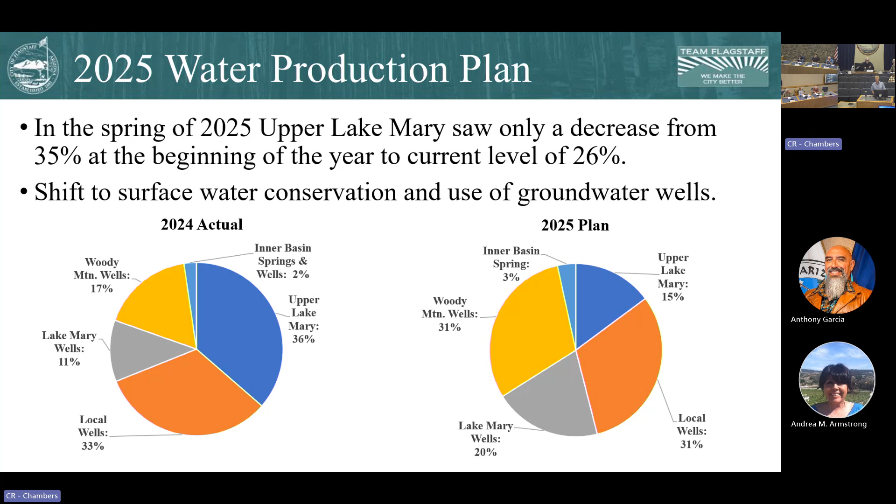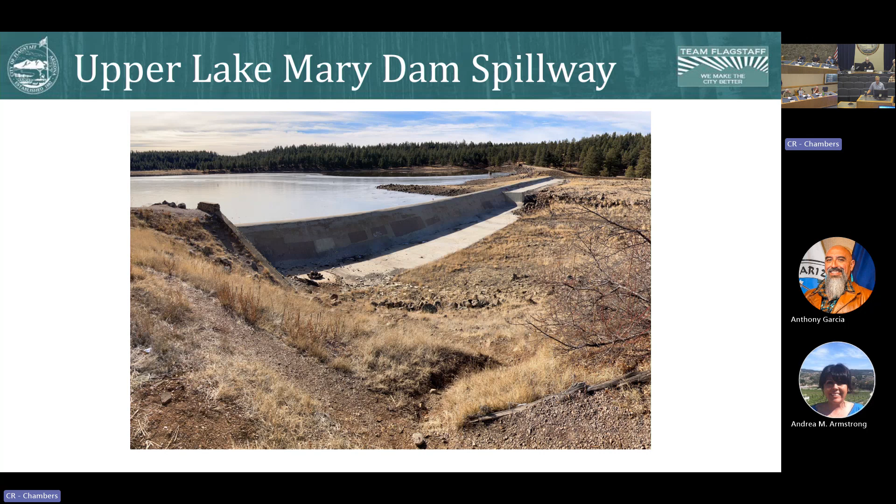It's not a good year for surface water production, but it will be a good year to deal with our Upper Lake Mary Dam spillway. For the last 7 or 8 years, Arizona Department of Water Resources has recommended that we deal with the concrete spalling of the spillway. You can see here in these up-close pictures. When the lake level is below 40%, we can touch both sides of the dam, so this spring is a great time to deal with the dam. We have Kear Civil, or Pride Development and Construction, planning on completing those repairs this spring.

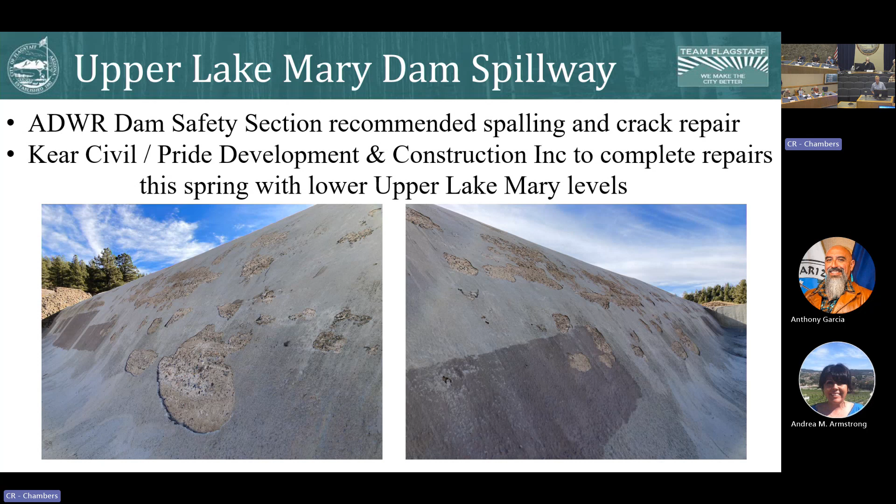Moving on to our Lake Mary Water Treatment Plant Sedimentation Basin Rehabilitation. This project's been in the works for a while. A brief history: in 2014, the Water Infrastructure Master Plan by NCS Engineers identified the sed basins as the highest priority needing attention in water production. In 2017, we did a condition assessment by Brown and Caldwell, which found severe corrosion and degradation with equipment near twice its design expected lifespan.

In 2020, we went through a design of the rehabilitation of the basins with Brown and Caldwell, though after that design was complete, a solicitation was canceled due to budgetary reasons. In 2022, we went back through the design to tighten up the specifications. A solicitation after that was also canceled due to budgetary reasons. So it's good at this point to be with PCL. We awarded them the pre-construction phase services for the project. PCL is currently working on those pre-construction designs, and you'll most likely be hearing about guaranteed maximum prices, or GMPs, moving forward with the project later this year.

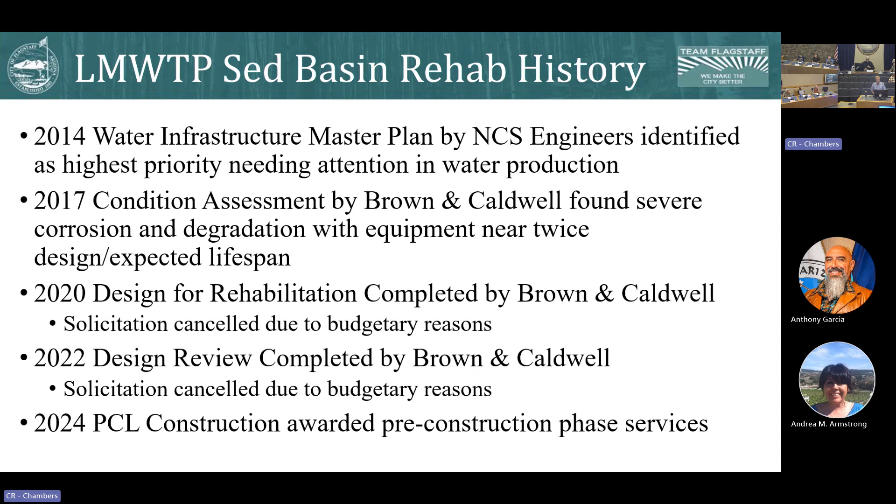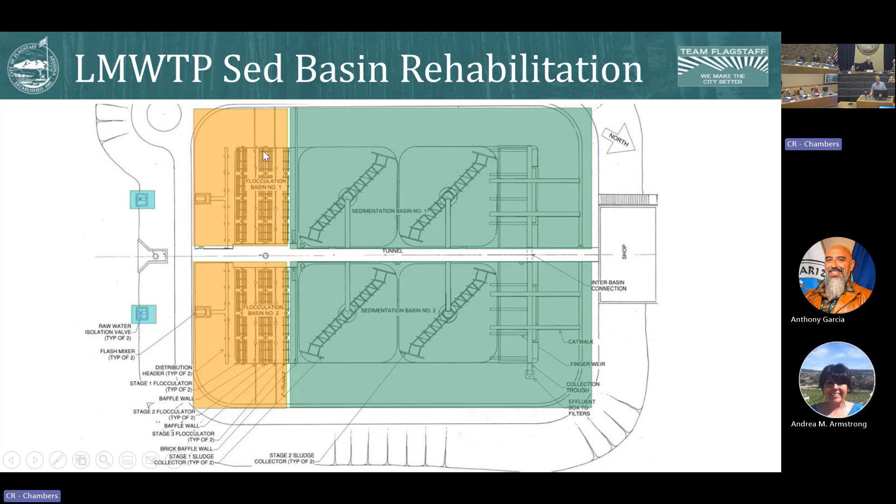For those of you unfamiliar with the sedimentation basins, here's just an overview. We'll basically be dealing with all of this infrastructure, replacing the flocculators, the sludge collector, infrastructure, all of the concrete supporting walls and structures, and adding a static chemical mixer.

A little hard to look at. This is some pictures of the existing infrastructure, near twice the design lifespan. You can see the concrete coating has dissolved over the years with low pH water, and you can see the aggregate, the existing sludge collectors from the 60s.

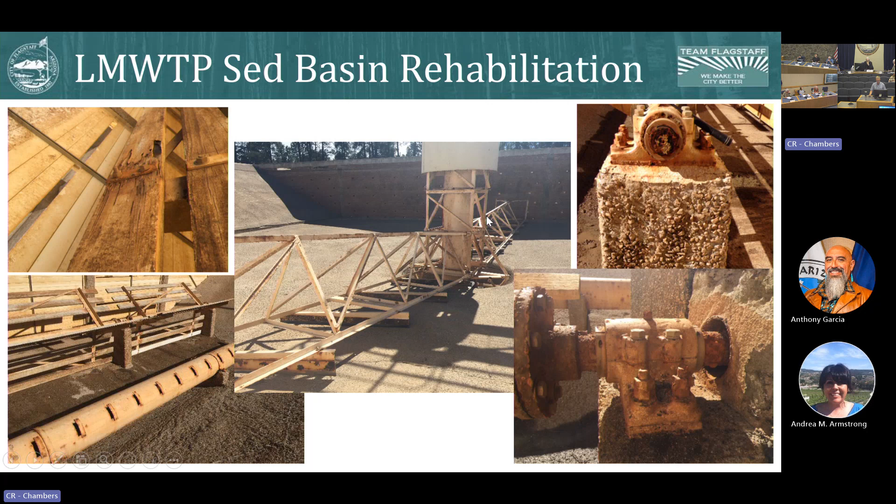Moving forward with the Lake Mary Water Treatment Plant master meter replacement. Brief history: in 2017, Carollo engineers did a technical memorandum of all water production flow meters. They found the current insertion mag meter was installed incorrectly or poorly with insufficient velocity at only 0.3 feet per second. 3 feet per second was recommended. Later that year, Carollo then designed a replacement master meter for the treatment plant.

All water from the Lake Mary wellfield, in addition to surface water, passes through this flow meter. Carollo's design included a new vault with smaller size to increase the velocity, increase the accuracy and precision of the meter. However, in 2019, a solicitation for that was canceled due to budgetary reasons.

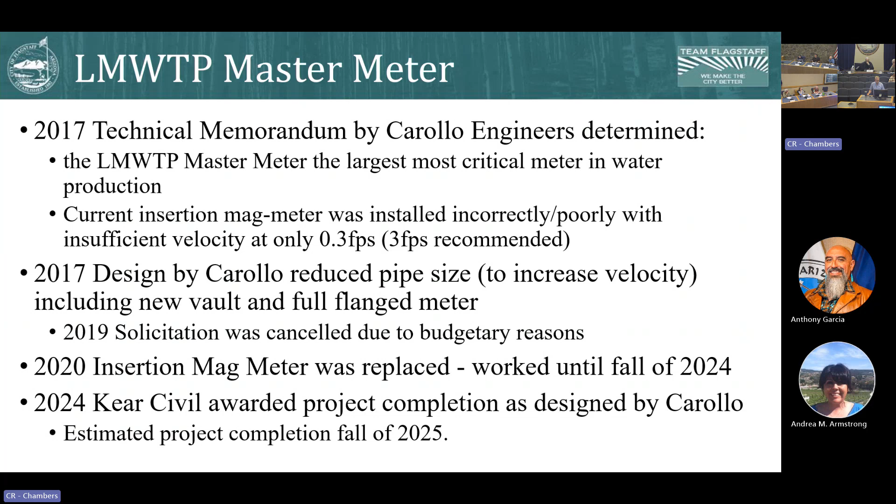In 2020, we at least replaced the insertion mag meter. That's worked pretty well. It took quite a few tweaks and adjustments, but that meter failed in the fall of last year. So we've awarded in 2024 Kear Civil to build the design completed by Carollo in 2017 to replace the master meter at the plant with the vault. Kear is currently collecting supplies and materials necessary for the project, and they're hoping to complete that this fall.

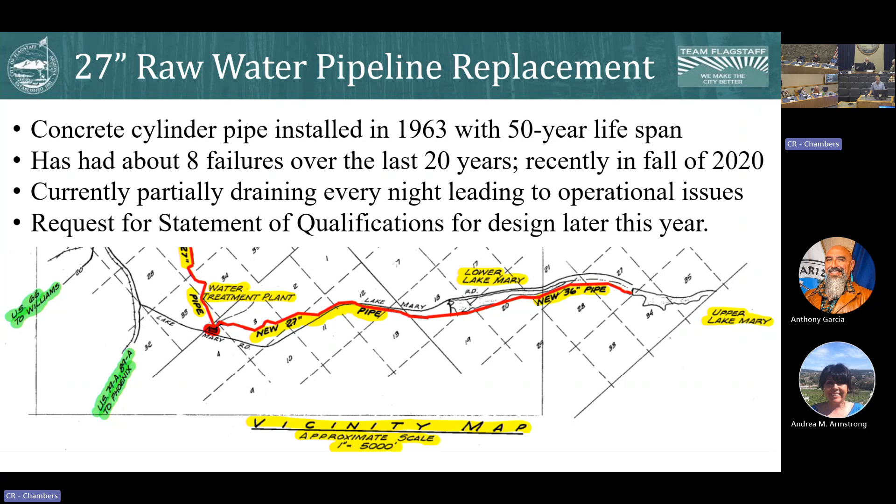Brian: On the 27-inch raw water pipeline, is the plan to remove that and replace it with new pipe, or abandon that pipe in place? A lot of those decisions haven't really been made yet. I think one of the latest plans was to do a parallel pipeline, leave the 27-inch where it is and replace it with possibly a smaller, maybe a different material pipeline. So basically a parallel replacement, leaving the 27-inch in place, but essentially abandoned.

I know the elevation at the Lake Mary Water Treatment Plant is a little higher than the lake itself, the crest of the dam. I was just kind of trying to think out of the box when I was looking at this project, if there's any potential for using that old pipeline to put water back into Lake Mary. Possibly. There's also an even older, I think, asbestos concrete pipeline, maybe 12-inch, that was abandoned a while ago that you could perhaps do the same thing with. Just a thought. So, okay, that's all I had.

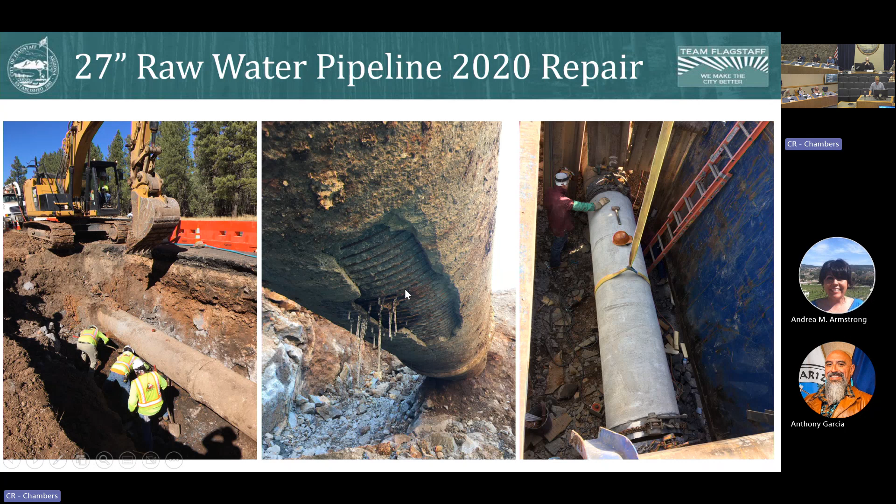Go ahead. These are just some pictures from the repair in 2020. This was an emergency repair that unfortunately happened when we had another one of our sources, the Woody Mountain well field, down for a project. You can kind of see the composition of that 27-inch pipe, the outside concrete, the bands, really thin gauge of steel, about 1/8 of an inch thick. And then this was the spool that we replaced after this was removed.

This project was awarded to Southwest Tank and Steel last year. Like I said, due to some weather and paint issues, there were some delays.

Just last Friday, the contractor, along with the paint supplier, came up with a solution involving rolling on the top coat of paint, which is just fine. That was going to be necessary for Buffalo Park tank in any case because of proximity to people. According to contractors, this is the same paint system used on the Golden Gate Bridge, so it should leave all these tanks in really good shape for 20 years. Lastly, the Buffalo Park tank, after it receives the paint system, will be getting a mural from Beautification Arts and Sciences.

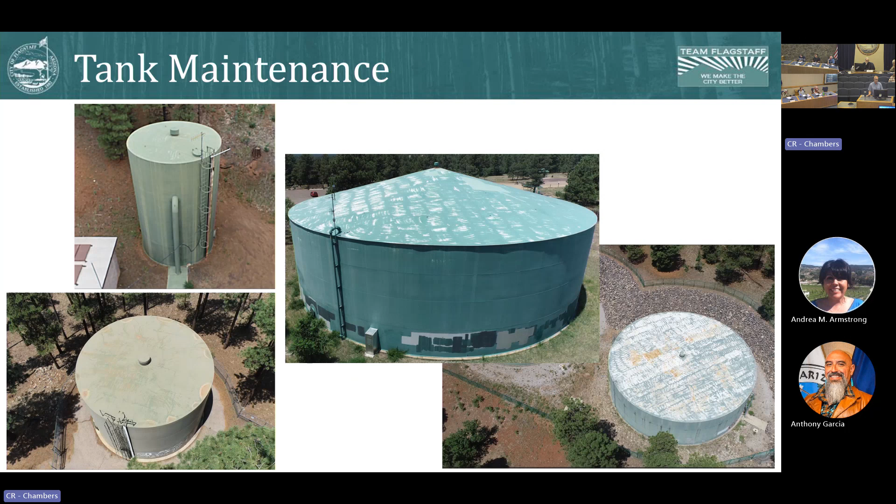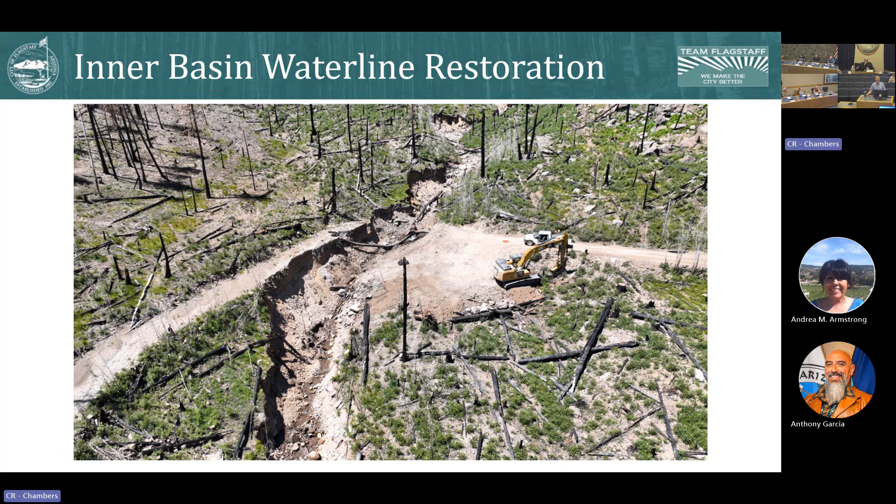Moving on to the Inner Basin waterline restoration. Most of you are aware of the pipeline fire in 2022 and the resulting devastation to the pipeline. Here you see the pipeline strung across this drainage at Site I. Hunter was mobilized in 2023. This is before they got to work on what became Site I. This is after Hunter repaired Site I along with the pipeline.

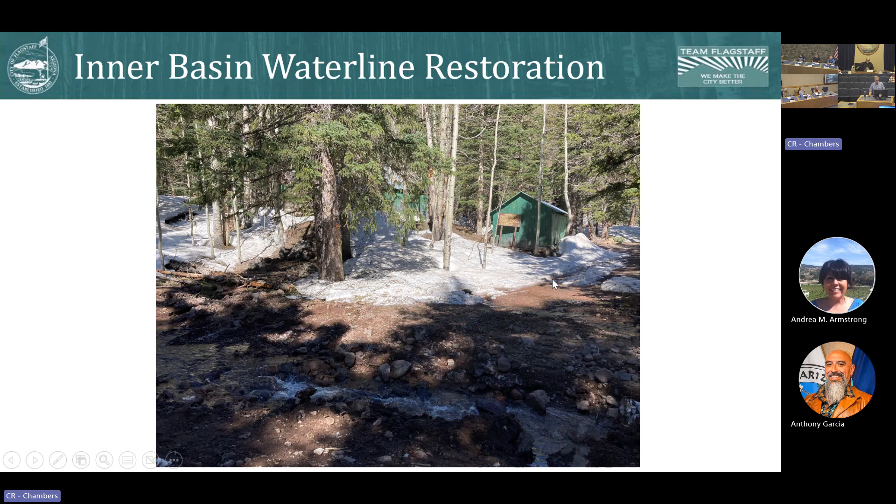Another location, if any of you are familiar with our Inner Basin cabin, Abineau Weir House. This is before any construction. And Site A, after Hunter added culverts and concrete.

In general, Hunter's been doing an amazing job. This project was funded by the Arizona Department of Forestry and Fire Management. Just excellent project management with David Peterson, Stacy Breckler-Nags. Hunter's been receiving award after award, starting with a safety award they received first, then also Project of the Year from the Arizona General Contractors Association, Water System Project of the Year from the Arizona Water Association, and Public Works Project of the Year, Disaster Emergency Construction Repair from the American Public Works Association.

Hunter's currently at work on the mountain. They nearly got blown off earlier in the week and had to halt their work, but they've been doing an amazing job over the last couple of years. They have a couple sites to wrap up. They currently have the pipeline removed for one of these sites, but just in general doing an amazing job. They're hoping to wrap up the project by this fall.

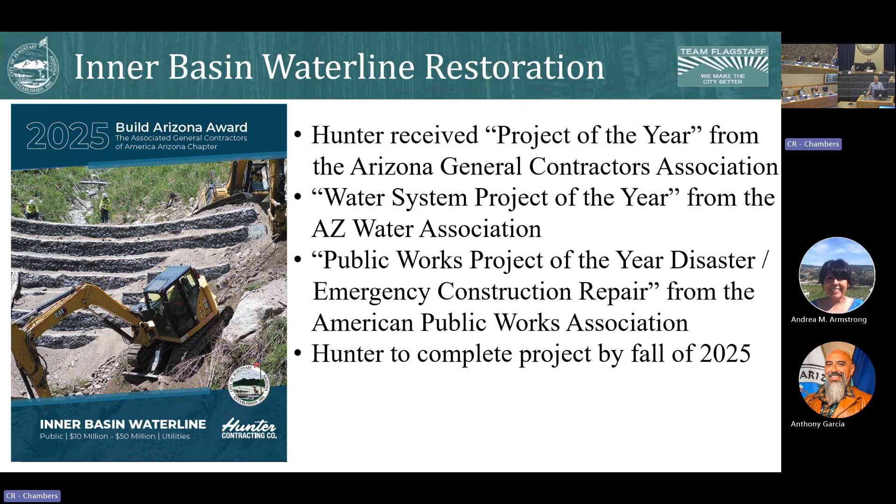Moving on to Arizona Public Service, or APS, Public Safety Power Shutoffs, Events, and Backup Power. Last spring, or the spring of 2024, APS announced PSPS events as part of their wildland fire mitigation strategy. Unfortunately, this would, or will, de-energize 75% of the city's potable water supplies. That's the Woody Mountain Wellfield, Lake Mary Wellfield, and Raw Water Pump Station. The Raw Water Pump Station pumps both groundwater from the Lake Mary Wellfield and surface water from Upper Lake Mary,

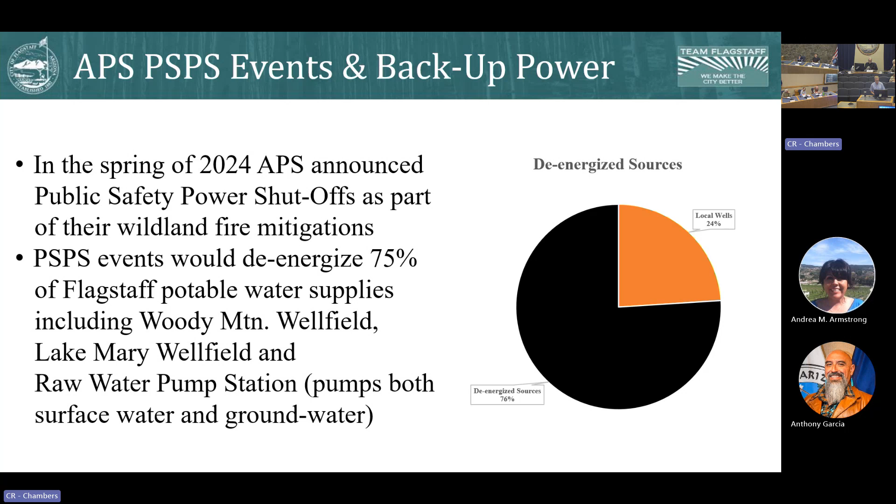It's not a catastrophic power outage that APS has relayed. And so, with local wells and the Lake Mary Water Treatment Plant unaffected, we're able to kind of pivot with the backup power that we've purchased and installed in the past.

Lee was part of a test of the Raw Water Pump Station with the backup power generator just a month or so ago. We found out that only really requires a single generator. With the other locations not needing generators, we're able to use those in the Woody Mountain Wellfield. We're currently underway installing backup power infrastructure, connecting generators in the wellfield where power drops from above ground to below ground at our Woody Mountain well number 6. Once that is completed, we should be able to power half the well field, or roughly 2.5 million gallons per day, with 4 of these generators. That makes the picture look a lot better.

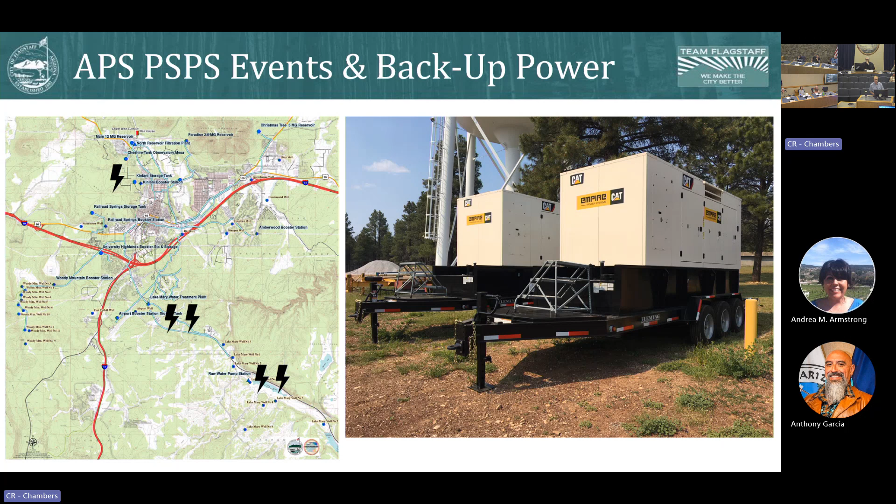In 2021, we drilled Tut Hill number 2 and tested it - that one tested at about 425 gallons per minute. We're underway with Carollo Engineers to reconfigure the well house to take in both Tut Hill 1 and Tut Hill number 2.

We first went through a design matrix where Carollo helped us make the decision whether to build two standalone well houses or reconfigure a single existing well house. We decided to reconfigure the existing well house - it was built with the potential to bring in another well.

This is a little exciting, I think, in that not only do we need to bring Tut Hill number 2 into the system - and reconfiguring the well house will enable that - but we'll also hopefully be able to unleash Tut Hill number 1 and gather more gallons per minute, taking that 1,100 hopefully up closer to the tested capacity of 1,500 gallons a minute, for a combined flow of about 2,000 gallons a minute, which is significant - as much or more than the entire Lake Mary well field combined.

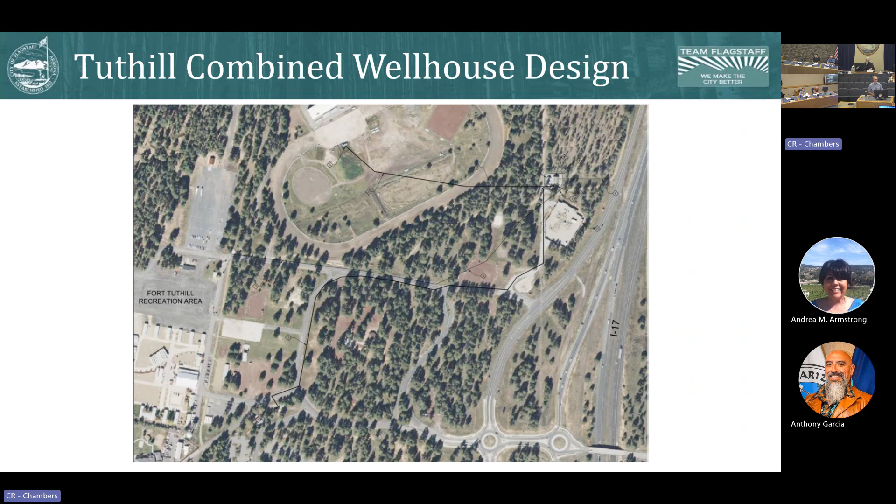Yeah, that was helpful. So it is directly involved - that master meter is directly involved in the control of pump operations. Yes. I see, okay, I didn't know where the controls came from. So, good. Any more questions from the commission for Brian? Yes.

For the water line work coming down from the inner basin, when the project is complete, does that mean we'll be able to deliver water to the North Reservoir? Yes, and we have. Hunter repaired the pipeline after mobilizing in the summer of 2023. We were able to use the pipeline, harvest water that summer. We produced not much, but about 8 million gallons off the mountain into drinking water, and also fill our exposed reservoir, if that's what you're talking about, from the early 1900s.

We don't use those exposed reservoirs, especially the one that leaks - we don't use that for anything. But the western one, we do store water that's not used for drinking water purposes, primarily for firefighting.

That pipeline has been used for all of the wildland fires in Flagstaff over the last couple decades, the Schultz Museum pipeline. For the museum fire, they did as many as 120 helicopter dips per day out of that exposed reservoir. The Inner Basin pipeline serves many purposes, including filling that storage reservoir.

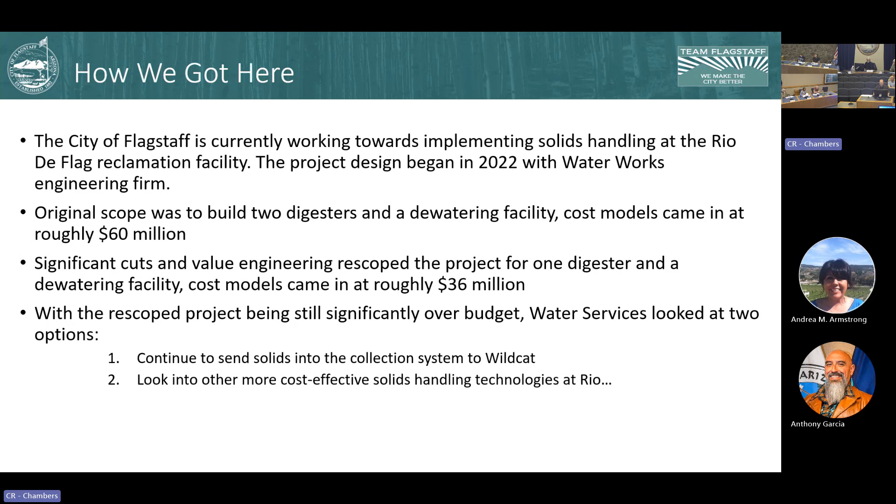Let's look back. In 1982, Wildcat was expanded to the treatment plant as we know today, minus the additions of the IFAS activated sludge process, 1 secondary clarifier, solids thickening, and solids geobag dewatering. The Rio de Flag reclamation plant was built in 1993 upstream in the collection system of the Wildcat Hill wastewater treatment plant, designed with 2 trains, each designed for 2 million gallons per day, and designed to produce A+ reclaimed water. Water conservation efforts has continuously increased wastewater concentration to Rio and Wildcat.

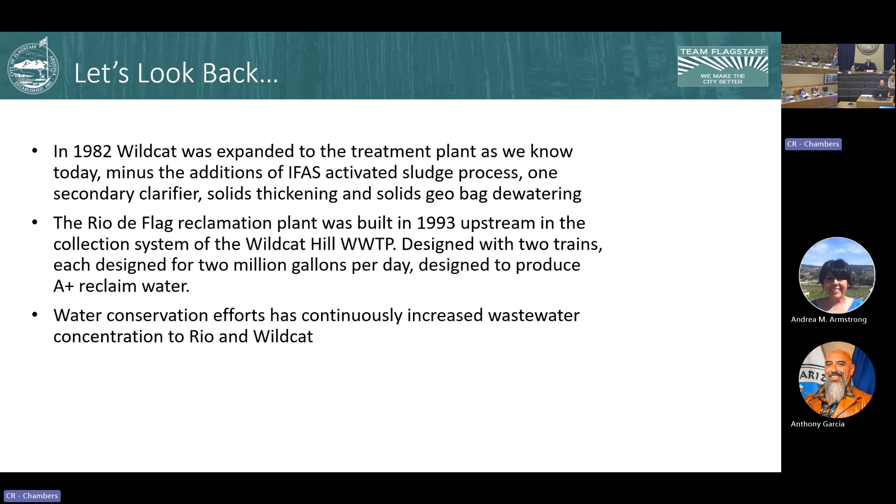Wildcat Hill design: in 1982 it was designed for an average dry weather flow of 6 million gallons per day, with a peak dry weather flow of 12 million and a peak wet weather flow of 20 million. Loadings were BOD, biochemical oxygen demand, of 10,800 pounds per day, and suspended solids 10,800 pounds per day.

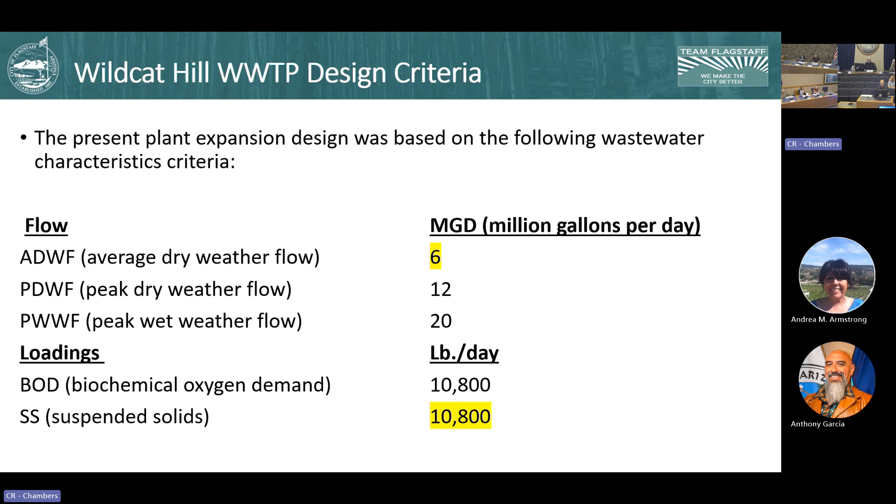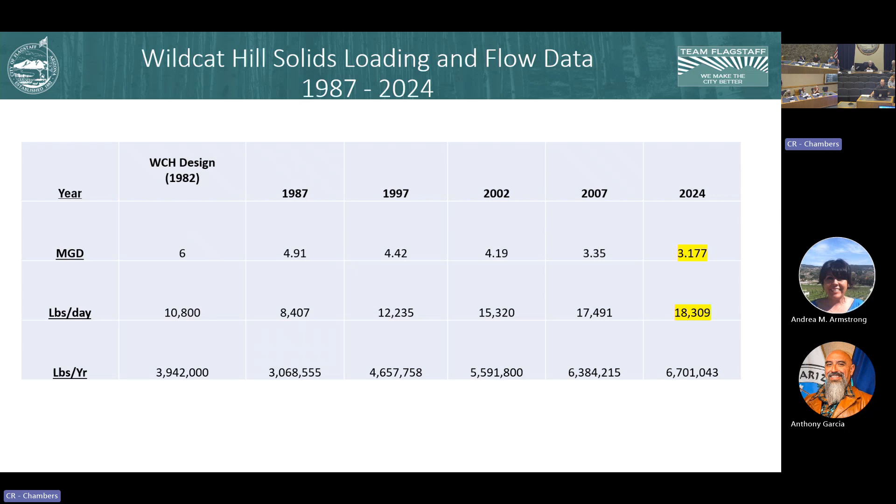In 2002, 4.19 with the loading of 15,320. 2007, 3.35 with the loading of 17,491. And for 2024, 3.177 MGD, 18,309 pounds per day.

The addition of the Rio de Flag plant: in 1993, the Rio plant went online upstream of Wildcat, designed to take flow, treat wastewater to reclaim water standards, and return the solids back into the collection system. Rio is designed to treat 3,970 pounds per day at 2 MGD. As of 2024, the plant treats 5,600 pounds per day at 2.2 MGD. Since the addition of the Rio plant, the Wildcat Hill plant has seen a reduction in flows, which is beneficial.

However, there's been a detrimental increase in solids loading in the following years to Wildcat. The reduction in flows to Wildcat can be attributed to both water conservation and the addition of the Rio plant. The increase of solids to Wildcat can be attributed to the increase in solids produced by the Rio plant and the expansion of City of Flagstaff and the surrounding areas.

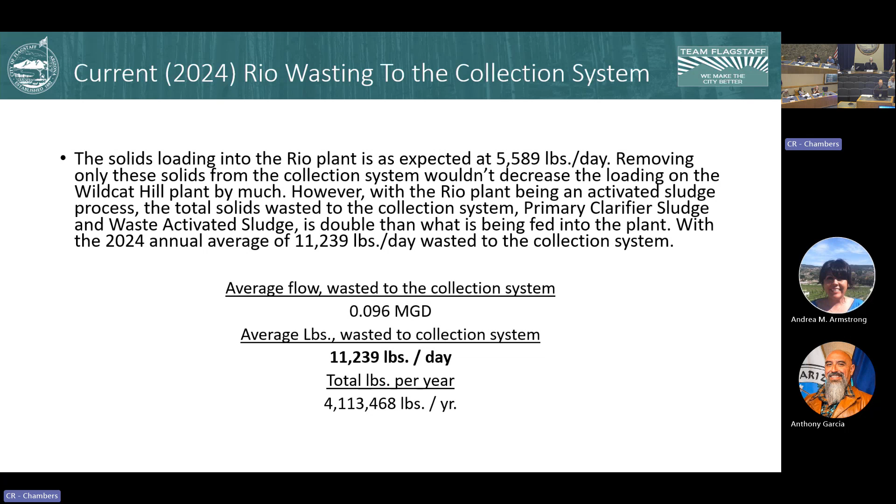If we take those solids out, 11,200 pounds per day, we can then project the loading into Wildcat, and right here it'd be 7,000 pounds per day.

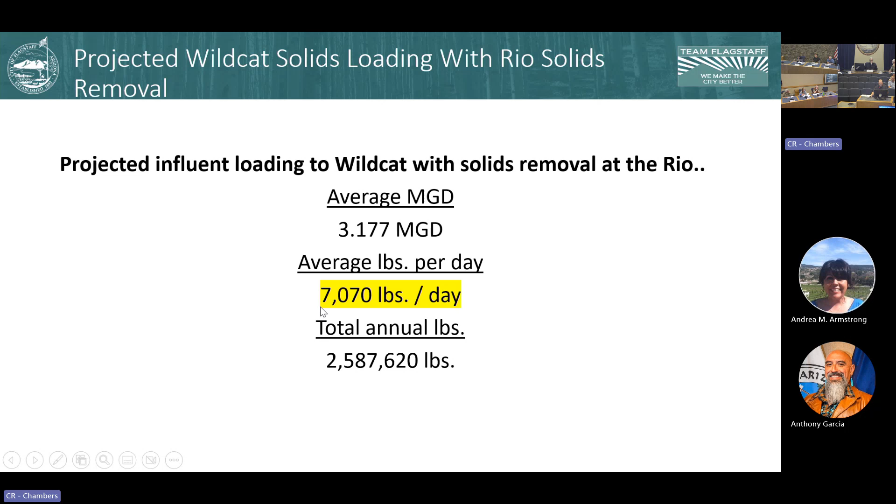All right, solids dryer dehumidifier. After realizing that the digester options were too expensive, staff investigated other technologies and alternatives. The technology we discovered was the Shincci dewatering and dryer unit. The dryer, a low temperature sludge treatment unit, combines dehumidifying and energy recovery. This utilization of energy means there is no waste of any heat during the drying process.

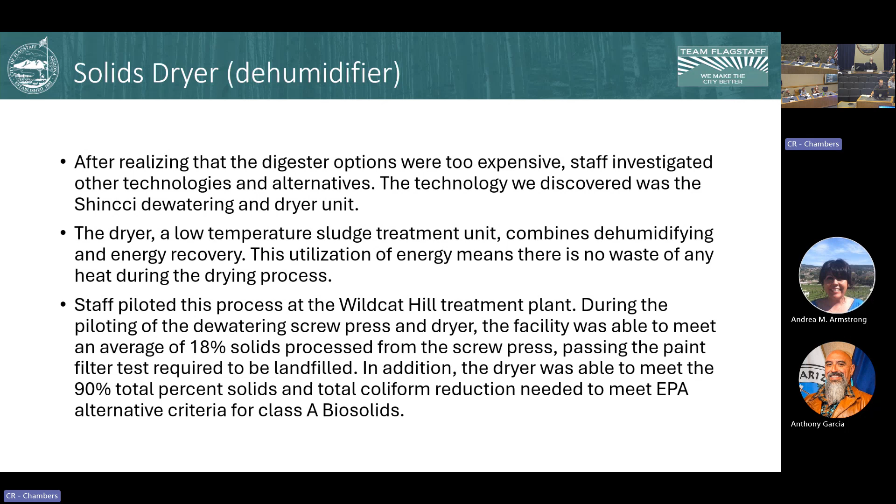Staff piloted this process at the Wildcat Hill plant during the piloting of the dewatering screw press and dryer. The facility was able to meet an average of 18% solids processed from the screw press, passing the paint filter test required to be landfilled. In addition, the dryer was able to meet the 90% total percent solids and total coliform reduction needed to meet EPA alternative criteria for Class A biosolids.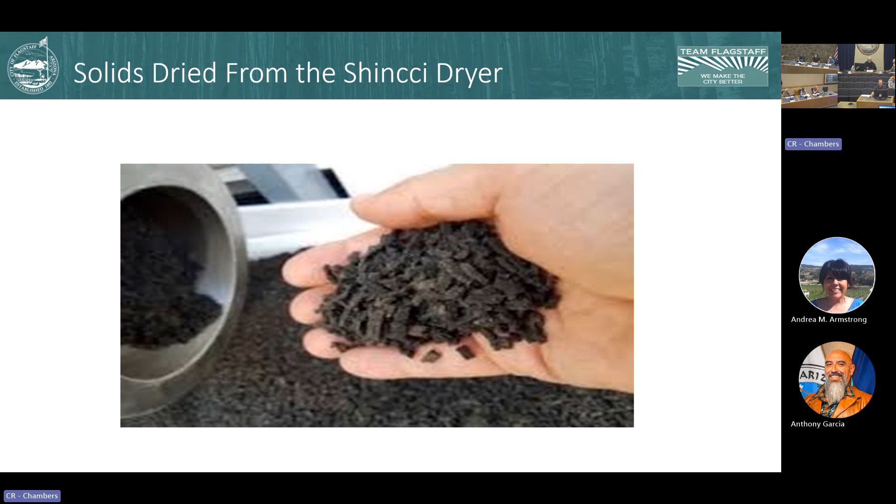All right, digester versus dryer. A digester is more expensive with concrete tanks, takes up more space, relies on bacteria. It can foam, presents safety hazards with methane gas, is messy and heavily operator dependent. The dewatered material will only achieve 15 to 20% solids.

Moving these solids to the Wildcat Hill DLD, dedicated land disposal, or the landfill would be more expensive, estimating 4 to 5, 20-yard roll-off bins per week. Achieves Class B EPA biosolids standards.

The dewatering and dryer unit works by dewatering the raw material, skipping the digestion process. Material is dewatered to 15 to 20%. The dewatered material is then fed to the dryer to achieve 90 to 97% solids, meeting Class A EPA biosolids standards. This allows for removal to the landfill or Wildcat DLD, is easier to operate, less expensive, less messy. Estimates 1 to 2 roll-off bins per week. Also is ready for biochar in the future.

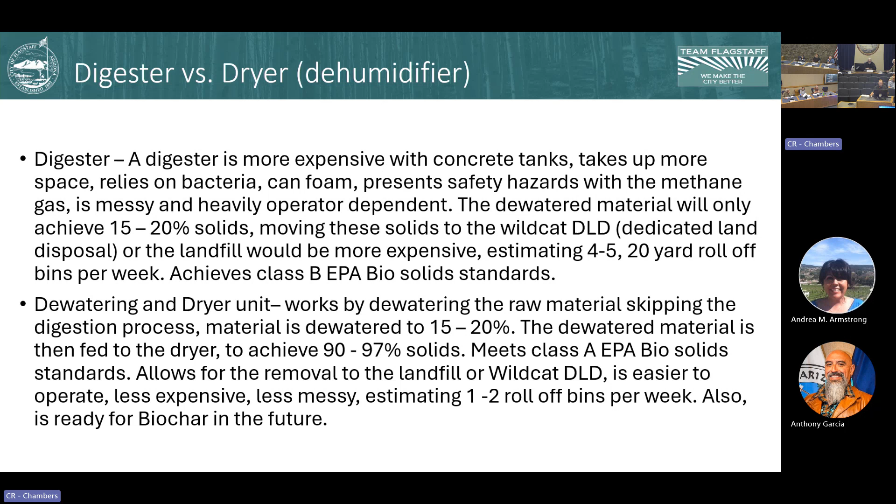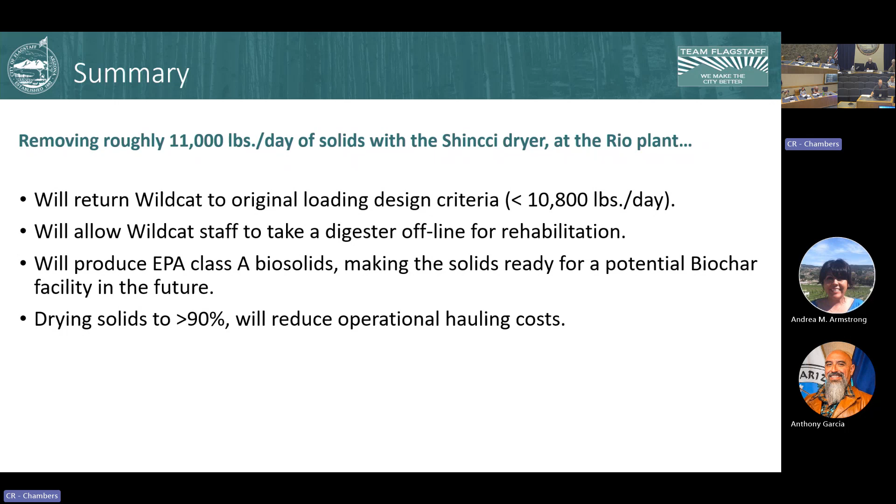Okay, summary. Removing roughly 11,000 pounds of solids with the Shincci dryer at the Rio plant will return Wildcat to the original loading design criteria, less than 10,800 pounds per day. It will allow Wildcat staff to take a digester offline for rehabilitation and produce EPA Class A biosolids, making the solids ready for a potential biochar facility in the future. Drying the solids to greater than 90% will reduce operational hauling costs.

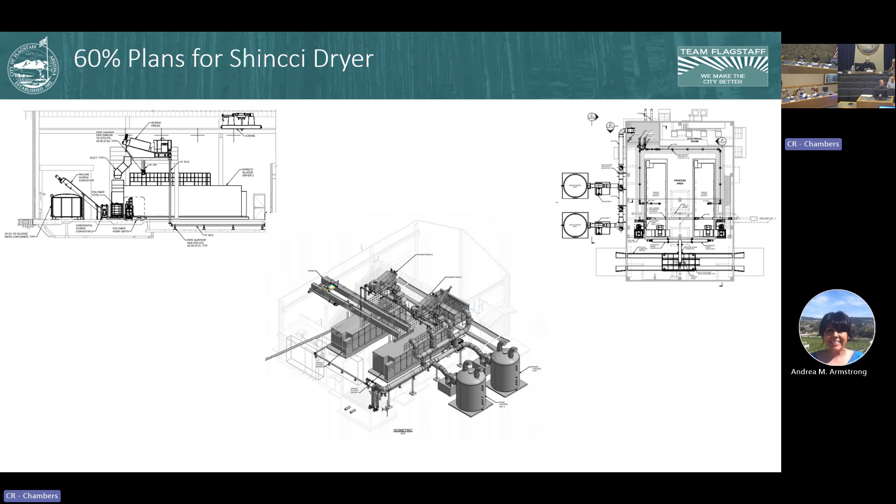We have a solids problem in the city and we need to handle it somehow. Having explored different avenues, Troy's math shows this will take us back to almost the 1987 loading on the Wildcat plant, which could buy us time on rehabilitation or construction of a new plant, which is incredibly expensive. Coming into this project, we need to get rid of the solids efficiently. I know this is operationally expensive, but it has less upfront capital cost.

Another question following on this topic: by reputation or hearsay, the city is approaching its solids handling limit, which in the extreme case could halt all construction in the city. Where do we stand on that dimension?

There are fuzzy numbers sometimes, depending on what modeling you look at and what growth you assume for our city over the next 20 to 30 years, whether it's 1%, 1.2%, or 1.4%. We're in a good spot right now. If we can get the solids out at the Rio plant, it puts us in a good position for several years while we work out the new plant at the Wildcat facility. Does that answer your question?

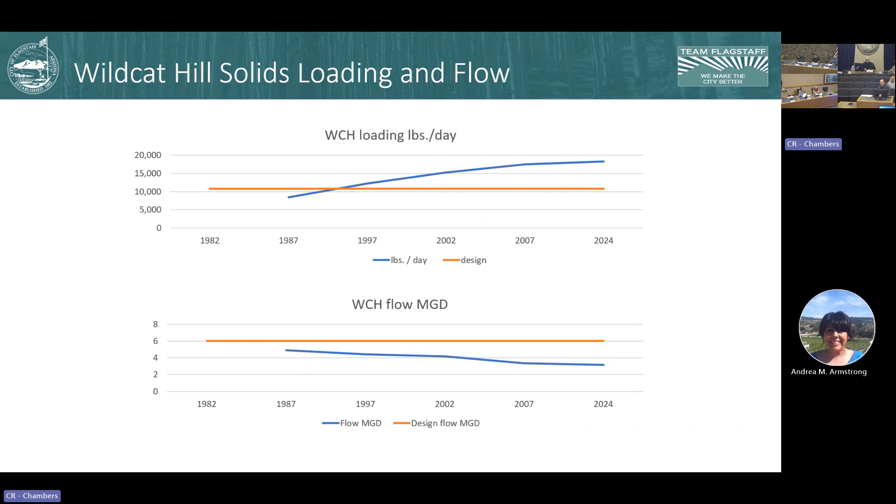Okay, well, again, thank you Troy, good presentation. Thank you—interesting discussion. We want to keep up to speed on what's going on with our solids problem for sure. Let's see, we've got about 5:30, let's move on.

We've got another item on the agenda, some old business: continued discussion on reclaimed water, user conservation, and efficiency. And Aaron, hello. Hello.

Good evening, Chairman Doba and Commissioners. Erin Young, Water Resources Section Director, and I have with me Tamara Lawless, our Water Conservation Program Manager. I thought I'd open by revisiting the marching orders from the last meeting and touch on what we've accomplished since then. Number one was bringing the water conservation guru to the meeting—accomplished.

One of the tasks was for staff to investigate the legal basis for sharing information on individual water usage, and we did reach out to our legal team. The first question really is, is there a need to know what that information is? So if the commission or the work group wishes to take the approach used in the 5MP and the AMAs, establishing a water usage criteria per acre, either people are in compliance or not.

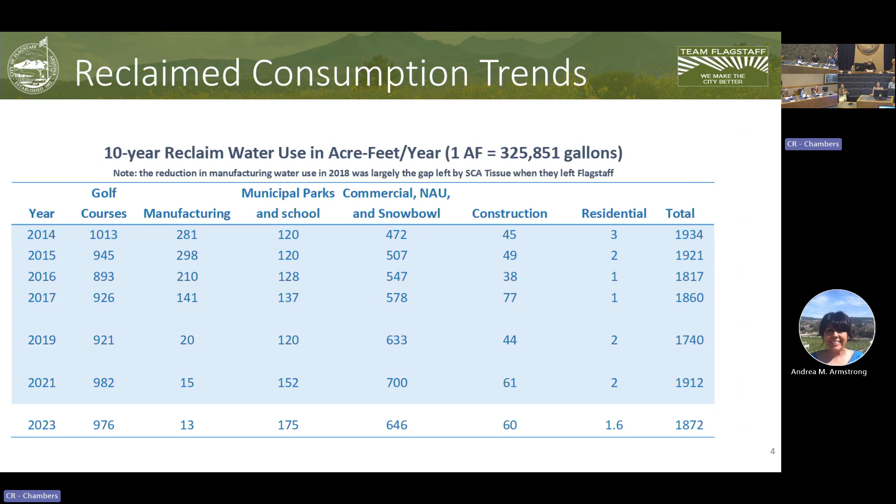So in terms of best practices in water conservation, some of the things that came up for me would be, one, no irrigating between 9 a.m. and 5 p.m. That's common sense — if you're applying water during those times, most of it's evaporating, so it's not really a good investment, and it's also not usually great for the plants, because most plants want a good soaking where it's getting down to the roots. When it's evaporating rapidly, that's not ideal.

We have the water conservation ordinance that has that provision for potable water. So if we wanted to apply that same provision for reclaimed water, it would mean opening up that water conservation ordinance and changing a little bit of the wording to make it clear that it applies to any irrigation, regardless of type, potable or reclaimed.

The next one down is equipment upgrades for optimized use. That might mean requiring all reclaimed users to have weather-sensing irrigation controllers so they're not watering when it's raining, and that the spray heads they have are efficient. There have been a lot of upgrades in equipment on how spray heads apply water. We could also look at whether some of them could install drip systems where appropriate, if they're watering things like trees and shrubs and not turf.

When we talk about best practices, we also usually want to talk about water loss control. That means looking for leaks in the system, making sure operationally our system is tight, checking the meters we're using to monitor how much we're putting into the system versus how much we're selling to customers and making sure those are in agreement, and doing any additional theft management if needed.

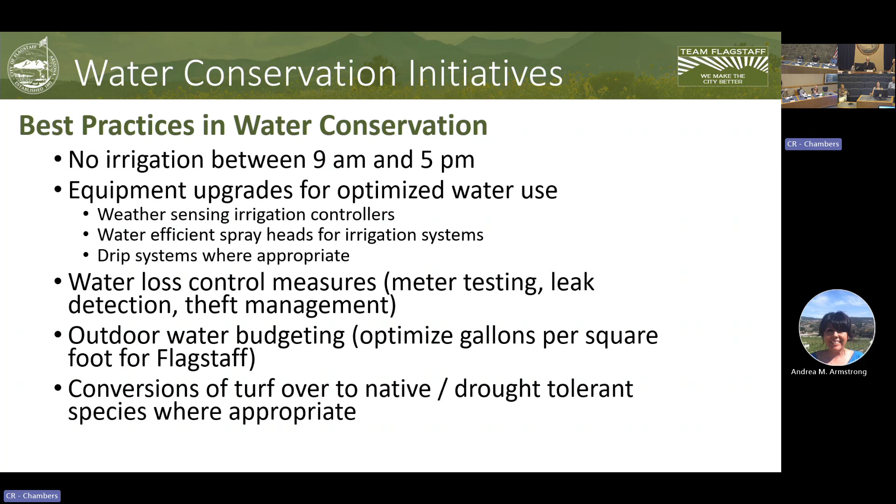Very few of these things we have explored yet for reclaimed water. Any of these could be great choices if we're just talking about treating it the same as we do potable.

If we're talking about doing some demand reduction, we could also do every other day watering like we do for the potable system. That would be like a peak reduction measure. We could also do no watering Mondays. That's part of the water conservation ordinance too.

We talked a little bit with Troy about the Buffalo Park tank, and he was saying that tank is under the most stress draining in the early morning hours. It sounds like a lot of the city parks are irrigating during the hours between midnight and, let's say, 7 a.m.

This is something we were kind of confused about, but it seems like flows into the system are lower at that time too, right? Most people are sleeping, so the flows into the system are low. So the tank isn't rapidly filling, and it's also rapidly being used by the parks at that time.

So maybe having a no watering day on Monday would give some time for the tank to fill, although obviously it's a finite tank — once it's full, it's full. So to that discussion, maybe it would make sense to come up with more regimented schedules for customer uses.

I was asking Troy, if right now there's a little bit of stress on the system in the early morning hours, should we ask parks to pilot watering between 8 or 9 p.m. and midnight instead, and not water during the early morning hours? Troy said, I don't know, maybe it would help. We don't know, we haven't tried it yet.

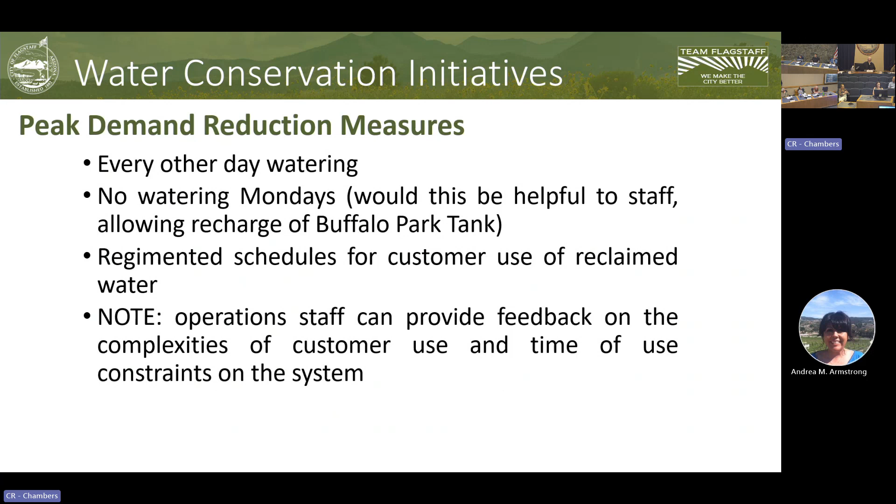But for me right now, that's all kind of a black box. I don't really know what's in there, and I don't really know what we could do to smooth it. So those are kind of my two ideas. I'd like to hear, does one type of those goals appeal to you all more than the other? Do we want to try to pursue both? Do you want to dig into the demands? Obviously our time is finite.

Figuring out what you want to see most, or what you think is the most productive use of our time, would be important. I'd also like to hear if you think we should be making a policy change to the water conservation ordinance, because that kind of thing usually takes months - getting the legal review and figuring out what words need to change and what that would mean if we opened up the ordinance to revisions.

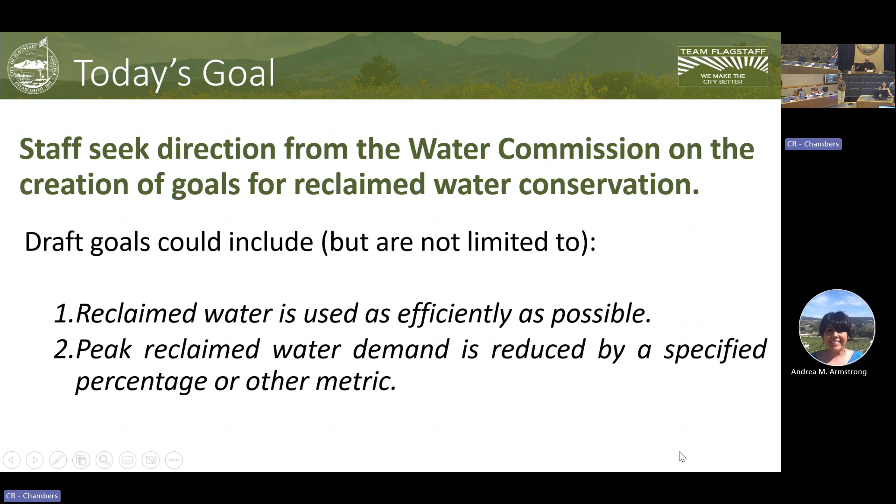Okay, informational items to and from the chair, commission members, or staff. Anything, Rob?

Would it be okay to voice two requests for future agenda items? Sure, I guess I'll look at Lee as well.

One, I guess a progress report on what I think of as the Katie Vanyo master plan. I see by the schedule it's due to be complete in August, and I'm not sure Ron was even aware of that. No, I'm not, what was that? The report to the Water Commission trying to streamline the numbers, is that what you're asking about with Katie Vanyo? You're familiar with Katie Vanyo, right? Yes, yeah, she's with, is it with Hazen?

Yeah, she left. Rachel So was her partner. Is that her name? I think Rachel So was her partner last year. She is still with the firm, but Katie has moved on. Okay, well anyway, you have a big master plan being done by them, and according to the schedule, it's due in August.

To take a step back, Katie Vanyo is working on our report to the Water Commission and working on streamlining some of our tables. The treatment facilities master plan, which is due in August, is being worked on by Andrea Odegaard, and she is working with Hazen. Okay, that's the one I'm referring to. We last heard about that roughly last August, and I think it would be timely to hear about that again, to get an update. We will get you an update, it's getting close to completion.